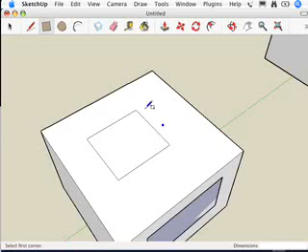So I get a nice clean rectangle when I draw on that surface, but when I drew a rectangle on this surface, let's delete this thing up here, I get this weird flashing behavior, called Z-fighting. That tells me there's two surfaces on the same plane, and these edges didn't turn nice and thin like these edges did, which means they're not actually cutting into this surface. That's incredibly frustrating because they should be, right? This is a face, and I drew this on top of here, so why isn't it actually cutting through?

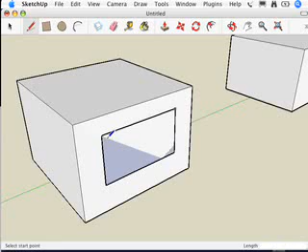Well, one of the things you can try is just retracing it. So let's take the line tool and retrace the edge there. Okay, that didn't work at all. So that's always the first thing you should try, retracing the edge.

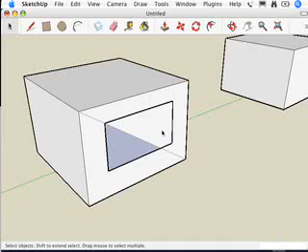So the second thing you should try is go up to the View menu and choose Hidden Geometry. When you turn on Hidden Geometry, it's going to reveal any hidden edges in your model. Sometimes those are edges you hid intentionally, and sometimes they're just hidden edges created when you're modeling in SketchUp. But regardless, when I look at this, I see I have an edge cutting across here.

Now, that edge was hidden, but it means I'm not going to be able to draw a rectangle that crosses that edge, because the edge is actually there. So that's the problem. Instead of this whole rectangle being one face that I could draw another rectangle over top of, it's actually two faces with this kind of hidden geometry line in between.

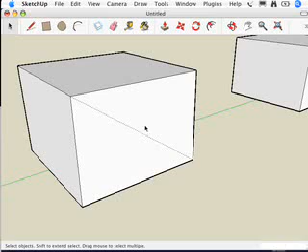The secret here is that I took this corner and pulled it out a little bit so that it's not a true plane. It's only pulled out a very little bit, but it's enough to create this hidden line. When that's the case, what you need to do is make sure you have a single face that you can actually draw those edges on.

In this case, I'll take the Move tool and move this with the Shift key held down while moving in the red direction. I'm going to get moving in the direction I want to go in, hold down Shift, and then click on the thing I want to get rid of.

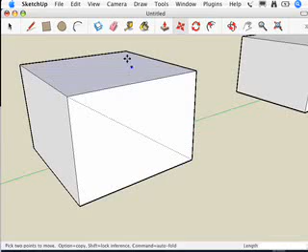And now when I do that, I can take the eraser tool and erase this edge, just like that. Once that edge is gone, I can take the rectangle and go ahead and draw it there, and everything is hunky-dory. See? Okay, let's try doing the same thing over here.

I've got this box, just like the other box. I'm going to take a rectangle and put it on there. You'll notice the same thing sort of happened as over here, I had these thick edges instead of thin edges. Basically, when I try to cut it out, nothing's happening.

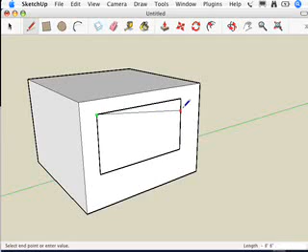It didn't work. The first step I could try is retracing one of the edges. Okay, well, retracing the edges doesn't work because obviously these edges aren't getting nice and thin to actually cut through this face. So what do I do now?

Well, what I want to do is go to View and turn on Hidden Geometry. Here I already had Hidden Geometry turned on because of the problem we solved earlier. So Hidden Geometry isn't the problem this time.

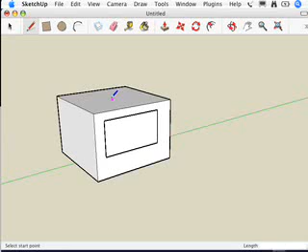Well, the third possibility is that this thing I'm trying to draw on might be a group or a component. To check, I'm just going to take the Select tool and select it. And lo and behold, it actually is a group. See, it says Edit Group. This means when I draw on top of it, I'm not drawing in the group, I'm not affecting this face.

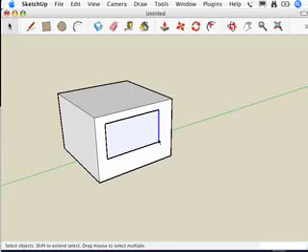What I did here is I drew a rectangle on top of the group that I was working with before. So I have two choices. I can either take this group and explode it so it's not a group anymore and draw a rectangle just like I want to, or, since you probably don't want to go around exploding things because it was probably a group for a reason, you can avoid that.

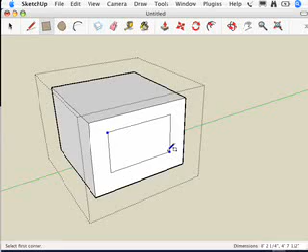In that case, what I'm going to do is double click to edit the group. Now that I'm editing the group, I can go ahead and draw a rectangle like that, and everything works exactly the way it's supposed to. So those are two things you can try when edges on your face won't sink in, and you can't get openings drawn the way you want them to.

That's the end of this video for Chapter 16 of Google SketchUp for Dummies.